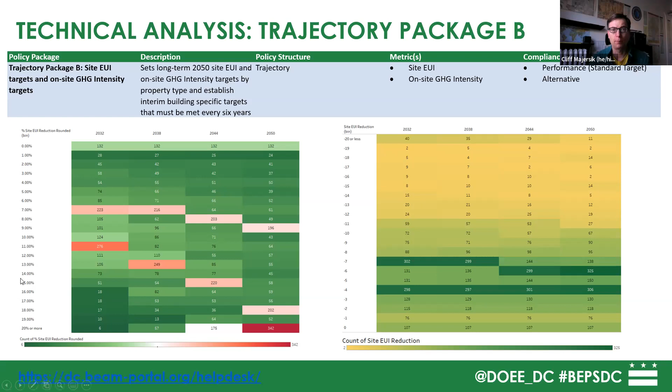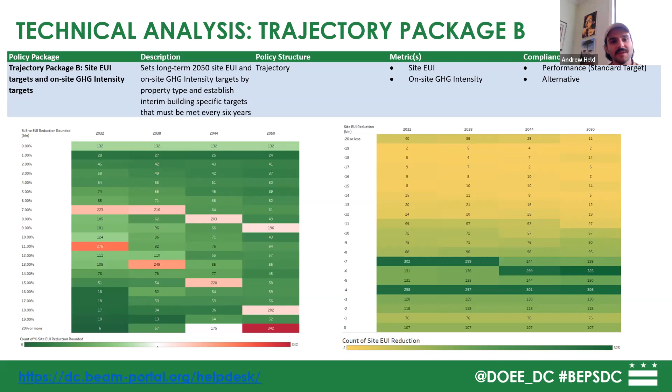Katie, if you go back to the previous slide, I can talk through this. The graph on the right is the carbon neutrality strategy. The top yellow part is basically the difference between all the strategies recommended in the study and the current business as usual case, which includes our standard BEPS. So everything we're recommending in carbon neutrality does a pretty big chunk of that. The green line is all the same policies, but at an accelerated rate. So the savings are realized earlier, which means our cumulative emissions savings are larger.

It doesn't get us to zero. I believe carbon neutrality includes some amount of offsets in it. I'm not familiar with the latest version of the study, so they might have revised stuff. This is based off of a working model of Carbon Neutrality DC, the final report of which has not been published. There is public documentation out there.

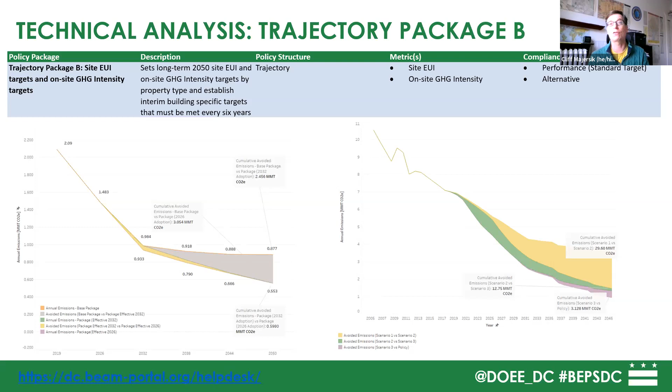Their buildings cannot buy offsets to credit them against their on-site emissions. So that's a real strength. This is focusing on real emissions reductions and not buying offsets somewhere else. And that actually distinguishes us from some BEPS policies in other jurisdictions that are not as strong. Yeah. Although I will say that we all should be prepared that the commercial real estate market is going to ask for that in a policy such as this.

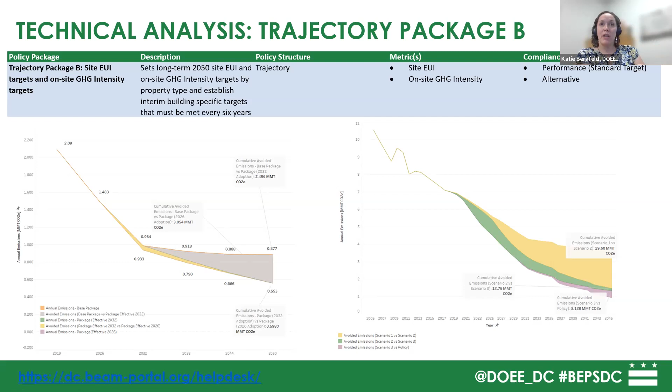I literally just had a conversation for a webinar that I'm going to give on Monday to AOBA, which is a building industry association here in DC, for all of you that aren't familiar with AOBA. And they already are bringing that up. Well, why don't you do what Montgomery County did? Or why don't you provide for offsets and renewables and all of that? So if any conversation about this comes up, it's probably going to come up from building owners. So it's a good question. Thank you. Yeah, they're already sort of asking me about that.

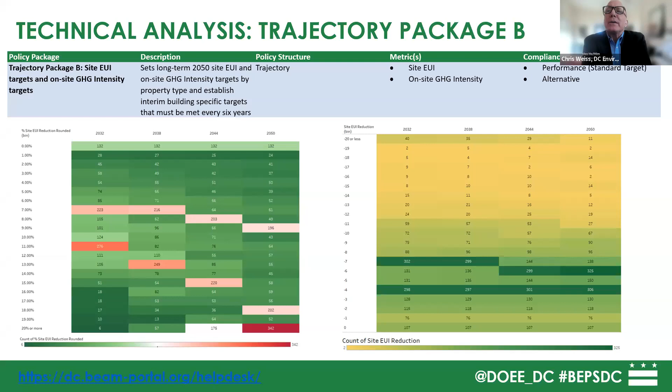Okay, are we close to the end of your part? Yep. So this is just the end. This is the last one. This is kind of just explaining why we recommend, sorry, we didn't choose, we recommend that package. It saves the most energy and avoids the most emissions over time. It meets most of the evaluation criteria that I mentioned before.

Building owners have long-term targets that provide certainty. It'll send a clear market signal to phase out fossil fuels, which we think is really important and our current policy kind of lacks. And it ensures electrification is done with energy efficiency in mind still, right? As per this conversation we just had. And there's long-term goal setting for each building, and there's sort of an off-ramp so that you can meet your target early, right?

However, as Chris mentioned, we don't recommend implementing these changes until after the first compliance cycle. So after this first compliance cycle has concluded, we can do a robust evaluation of where our program is at right now, coupled with stakeholder engagement. So we recommend that there be an effective date of 2032.

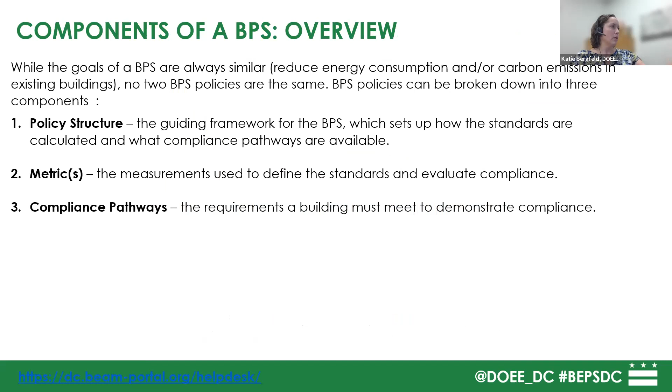That's a lot, thank you. And you certainly moved us a lot in the direction of your proposed alternative here.

So go ahead, Cliff. Why don't you share your screen? Yes. Okay. So I'm unmuted. You can hear me, right? Yes. Okay, good. Thank you.

So yeah, excellent presentation, Katie and Andrew. Just some background here. So I'll take the blame for the original BEPS, and I was the one that proposed the concept to Councilwoman Committee Chair Cheh, and so I'm very proud of it. It was a huge step forward. It's been emulated around the country. It was the first ever BEPS anywhere in the country. But

knowing what we know now, anytime you do something that's completely novel, you learn from it. And that's what this represents, us realizing that as good as our BEPS is, there are lots of opportunities for improvement. Other jurisdictions have copied what we've done and learned from it, and we're learning from what others have done. The trajectory approach is an approach that IMT developed after having worked with a bunch of different jurisdictions around the country.

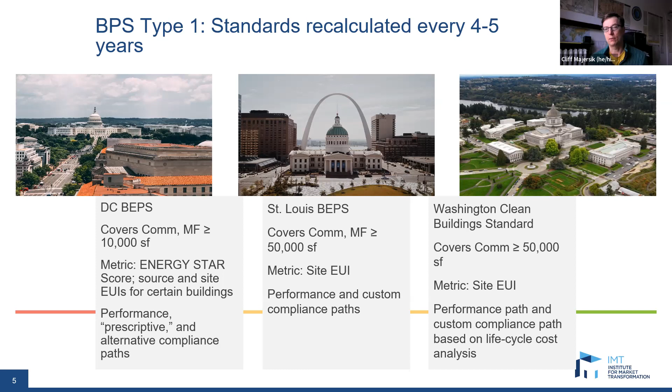So, there are broadly three categories of building performance standards, and you can break them up in different ways. But one, as Katie recounted, is what DC has now, where you recalculate every 4 or 5 years. DC was the first of all BEPS, and then you have St. Louis and Washington State that followed that model. And it has the problems that Katie mentioned of not having long-term certainty.

Then you have the greenhouse gas long-term set value approach that New York City and Boston have. And that has some real problems. Building owners in particular are very upset about the New York model. If you think building owners are not happy with the DC BEPS, you should talk to building owners about the New York law. And then you have the trajectory approach, which is increasingly the direction that jurisdictions are going.

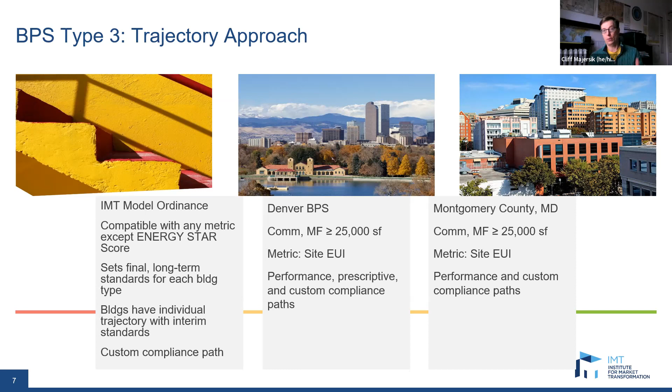So two of the most recent adoptions of building performance standards, in Denver and Montgomery County, use it. It's based on the IMT model building performance standard law approach. And it's also likely to get used in Colorado, and Chicago's using it as a starting point, Portland, Oregon, and a bunch of other jurisdictions that we're working with that are part of the coalition that are writing their building performance standards now.

Our model law is based on working with all the jurisdictions that have these, taking the best elements from each of the BEPS and learning from the lessons learned, the opportunities for improvements. We've also worked with equity experts and community-based organizations, environmental groups, building scientists, building owners, affordable housing providers, everyone that we thought could have expertise to improve it. So, we feel very proud of it.

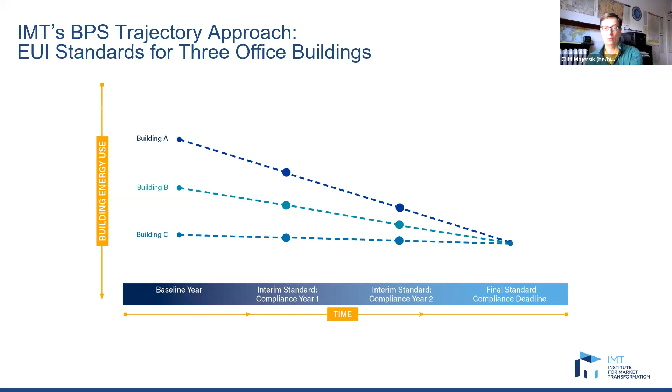It's a living document. We invite you all to download it from our website. And if you have feedback, we want to hear it. And that feedback isn't just going to go on a shelf somewhere. It's actively being used by all the jurisdictions that are adopting new building performance standards. This is the trajectory approach. Katie went through it. So, if there are questions, I can take them, but I'm not going to go through it again.

As Katie mentioned, the recommendation in the report is not just for site energy use intensity, but also for on-site and district thermal greenhouse gas emissions. The on-site greenhouse gas emissions is basically sending a very clear signal to the market that they need to get to zero fossil fuel in buildings by the final year. And certainty is really what we're striving for here.

We don't want any building owners to be under the mistaken impression that it makes any kind of economic sense to take out an old furnace and put in a higher efficiency furnace. We want them to have long-term certainty that no furnace that burns any fossil fuels is going to make economic sense, because they're going to have to meet a final standard well before the end of a lifetime of that furnace. So they should just go now to heat pumps. So that's a really central element that the current BEPS does not have.

Unfortunately, with the current BEPS, because you can only see 6 years out, many building owners may mistakenly conclude that they should just put in a higher efficiency boiler or furnace. And so that's an important advantage of this recommendation. And the recommendations, by the way, are on page 62 of the study. So, it's a long study with a lot of good stuff in it, but if you're only going to read one section, I would skip to page 62 and read from there.

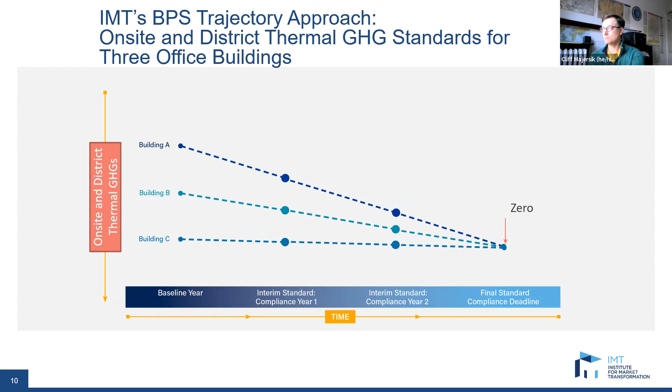So we know that buildings don't improve in straight lines. Building owners know their buildings best. They're going to decide what to do and when to improve their building based on what the physical characteristics of the building are, when the end of life of the equipment is. We know when there are tenant turnovers, empty spaces, that it makes it easier for them to make improvements. So this is just one example.

The recommendation is for sort of 5 years for each compliance cycle, and that matches up pretty well with the capital planning cycles that building owners already have. We need for them to be building into their long-term capital planning cycles: how am I going to improve this building to be part of the solution, to be part of DC accomplishing its decarbonization commitments? And the intention is that this BEPS sends an even stronger signal to the market that they need to do that. They need to build that into their capital plans right now.

So the IMT model law actually recommends the two metrics that DC is recommending. I would note that we also recommend 3 other metrics, and that's not covered by the study. And I think that building owners are somewhat reluctant to have more things that they have to comply with, for good reason. But we think it makes sense to treat buildings holistically in one law to get all of the things that we want from our buildings. And so the other 3 metrics that are in the IMT model law are coincident peak demands.